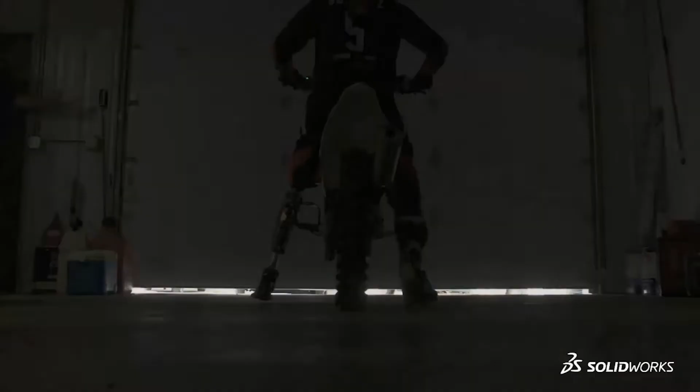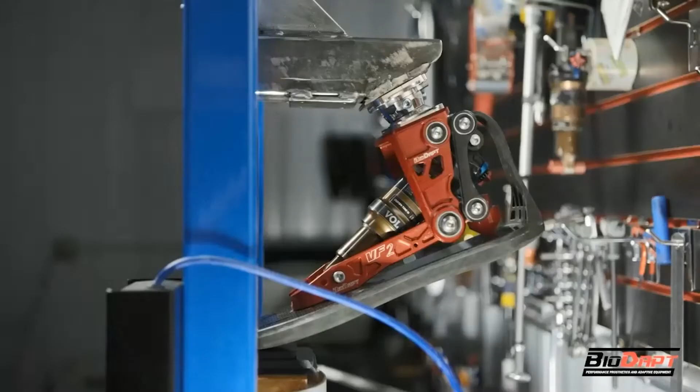Meet Monster Mike, a 36-year-old from St. Cloud, Minnesota, who has transformed the world of adaptive action sports in more ways than one. In 2008, Mike suffered a terrible knee injury during a snowmobile competition, resulting in the amputation of his left leg above the knee. Shortly after his accident, Mike was back doing what he loves, but a regular prosthetic wasn't cutting it. Using SolidWorks CAD, Mike engineered a durable and versatile mechanical knee. Within 7 months, he was again competing on the national stage at the ESPN X Games, receiving a silver medal in adaptive motocross. Mike's design has become so successful that in the 2018 Winter Paralympics, 20 athletes competed using the Moto Knee and VersaFoot to bring home a total of 11 medals.

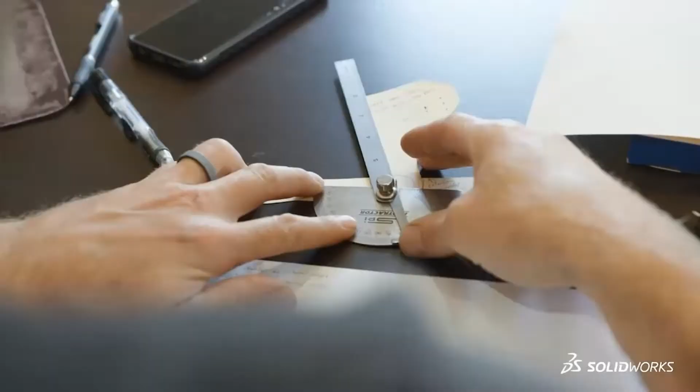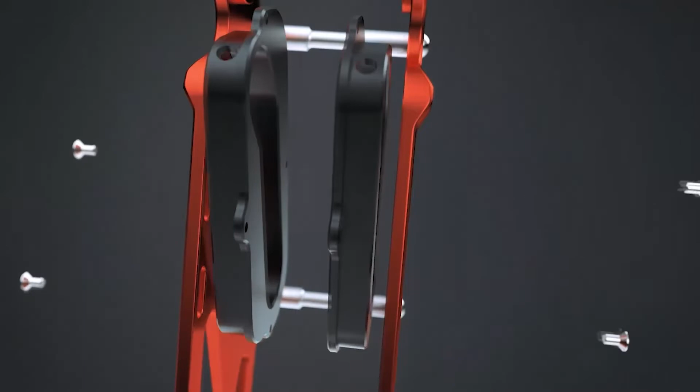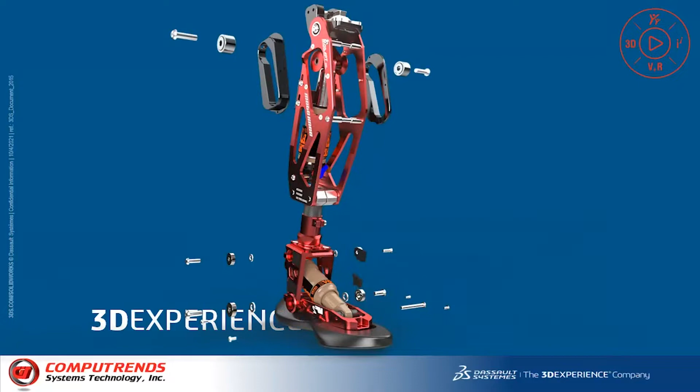Mike's company, Biodapt, along with this new line of knee and foot prosthetics, continues to evolve from its original design. Growth introduces new challenges of addressing a larger market and evolving product offerings. This is why the team at Biodapt needs top-notch product images of their newest prototype while remaining within budget. Additional prototypes and expensive studio shoots are out of the question.

Let's watch how Mike's team can tackle these challenges with SolidWorks Visualize Connected, powered by the 3DEXPERIENCE. Let's uncover how the team collaborates on new marketing initiatives, turns existing CAD design into photorealistic renderings, tests market interest with new color options, elevates product imagery with creative cameras and lighting, shows off attention to detail through exploded views, and puts it all together with a world-class presentation for sales and marketing.

Efficient project collaboration is key to getting these product renderings off the ground. Let me introduce a few of the newest team members.

Megan has been contracted to help better understand Biodapt's customers' needs, along with give their social media feed a boost with some fresh content. Don has been helping with the CAD design and has been diving into the world of rendering with SolidWorks Visualize. He will be perfect to help Megan get started with her marketing initiatives.

But these two are far from neighbors. Don lives in St. Cloud, Minnesota and reports to the Biodapt headquarters. Megan is located in sunny California, far removed from the cold winters of Minnesota. Because this team is working with the 3DEXPERIENCE, location is no longer a constraint when it comes to collaborating on projects, sharing ideas, and securing data.

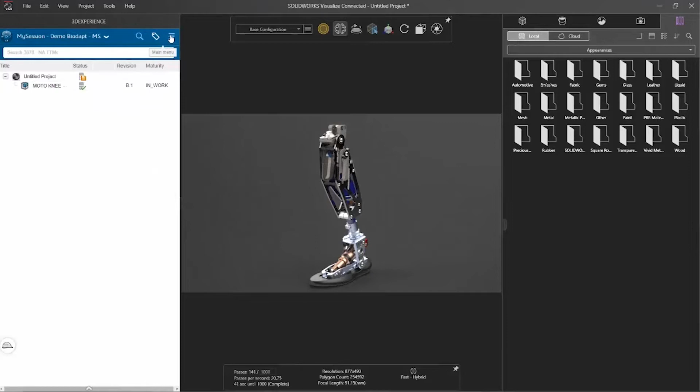A quick search finds the latest working revision of the Biodapt assembly, consisting of the Moto Knee and VersaFoot designs. Dragging the assembly from the 3DEXPERIENCE task pane brings this assembly right into Visualize for Don to start setting up the rendering project. Using the automatic import profile ensures the CAD assembly structure, material colors, and appearances are accurately carried over. Visualize Connected also creates a reference to the imported assembly.

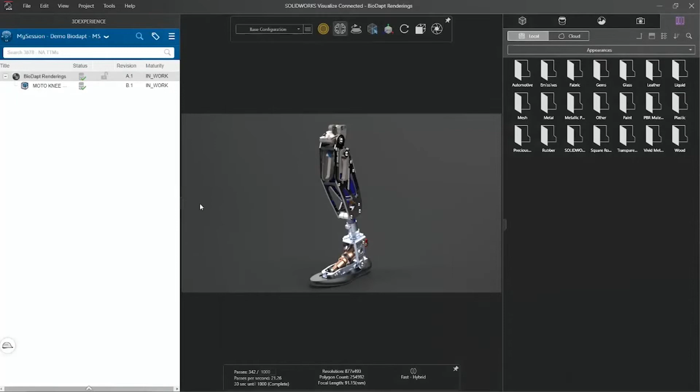If a change is made to the assembly, Don will be notified and can update his rendering project. Saving the project keeps his work secure to the cloud and accessible from any other device. The project is given a name and some revision comments during its initial save to the cloud. The 3DEXPERIENCE task pane can be collapsed to open up the simple-to-use interface in Visualize Connected. Don zooms into the VersaFoot after its fresh import to see how quickly Visualize brings these CAD models to life.

So far, we've watched how easy it is to initiate a project and begin collaborating on an idea with the 3DEXPERIENCE. Don has all of the CAD data and vendor files he needs to get started, while keeping everything secure and connected to the cloud.

This project is moving forward and Don is eager to dive into Visualize Connected. Let's see what it takes to get a few initial photorealistic renderings created.

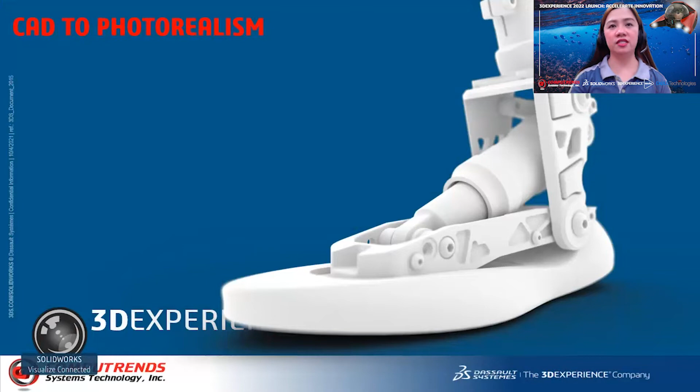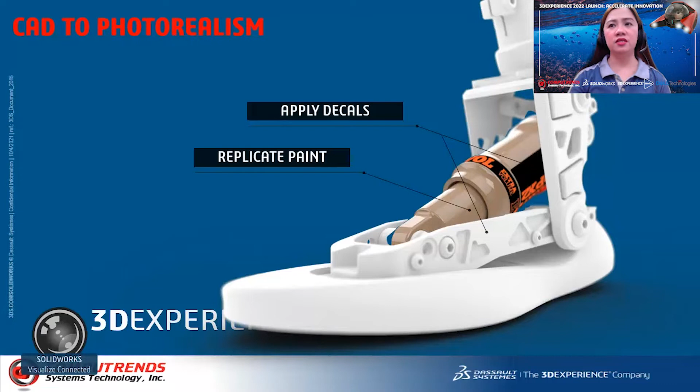For the first set of images, there are a few details that needed to be adjusted on the VersaFoot and Moto Knee assembly. Don will start off with applying some vendor decals. He will also need to accurately color match paints directly from the physical prototypes, such as the shock and the anodized treatment of the machined metal.

Since the part and assembly structure is retained during the import, it's easy to navigate, select, and isolate individual components and sub-assemblies. Don will start by applying some decals, which can be created from static images, animations, or image sequences. Megan has already supplied the approved decals from the vendor for Don to use, which has been synced locally to Don's computer through the 3D Experience 3D Drive.

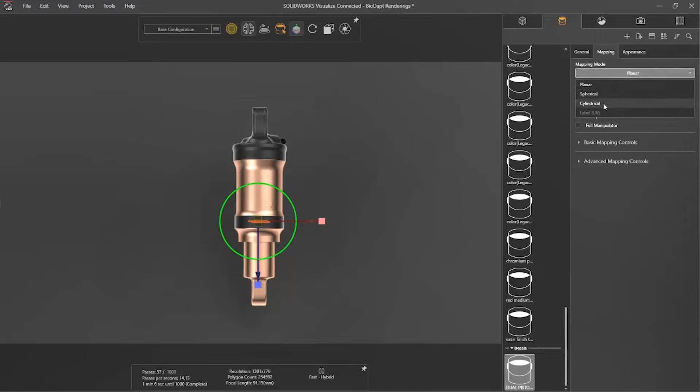Decals are applied by simply dragging the desired decal to the intended target surface. Don can accurately map each decal to perfectly wrap the cylindrical body, then with his mouse scale to the desired size. Repeating this operation for the second set of decals, scaling and positioning immediately brings the shock sub-assembly to life.

Taking a look at the material finish carried across from CAD shows a close resemblance, but it isn't perfect. Custom materials are simple to create or modify in Visualize Connected. In this case, selecting paint from the extensive material types gives the desired effect.

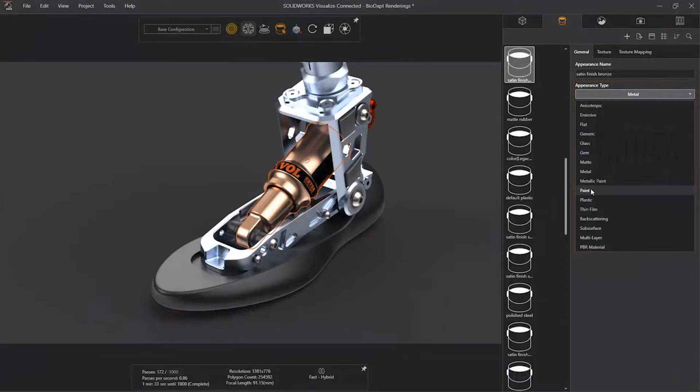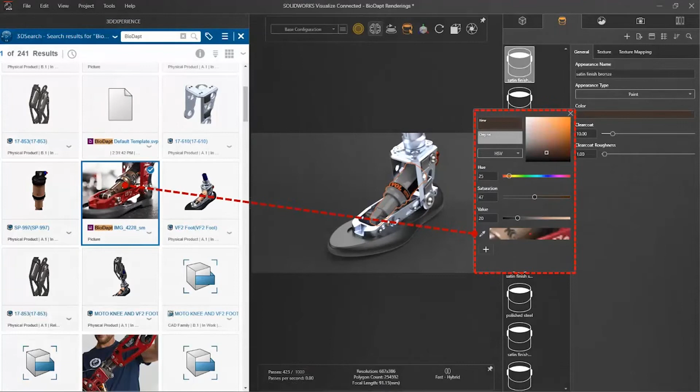And to make sure the color is an exact match, Don opens his 3D Experience task pane to reference an existing picture that Megan has added to the team's collaborative space, which is easily found from his search history. Having an image as reference is a handy way to make sure these renderings are as close to lifelike as possible.

Visualize takes it another step by giving Don an easy color picker to directly extract the color and match it in his rendering. Now to repeat this process for the machine components of the VersaFoot, the metal materials have already been defined and carried across from CAD. Don just needs to color match the anodization from the existing new generation prototype.

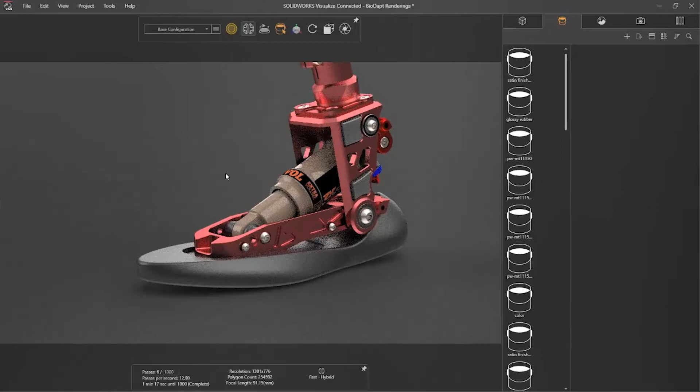As Don makes the appearance modifications, visual real-time rendering makes sure he is seeing exactly what his final renderings will deliver. There are a few more steps to the VersaFoot assembly.

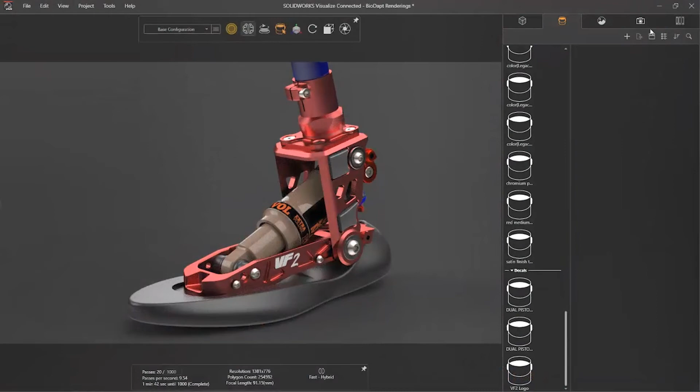The VF2 decal can be applied and adjusted into position just as we saw before. Additional appearances can easily be applied as well from the Visualize library. Adding a carbon fiber finish can be done by searching the library for the appropriate appearance by dragging and dropping.

So far, this project of the VersaFoot is looking great. With direct access to the most current CAD revision and an easy-to-use interface, Visualize Connected makes for quick work to import a design and its defined materials, add decals, and create additional custom appearances on the fly.

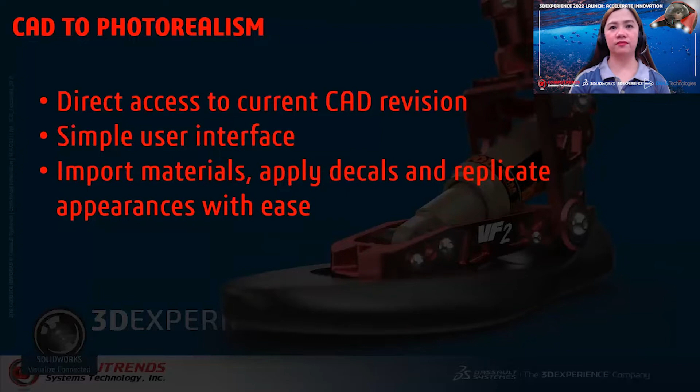Don has a good start on the static renderings, but still has a few specific items that Megan has requested. Megan wanted to see what some color options would look like and use these images for social promotion to hopefully identify some new opportunities.

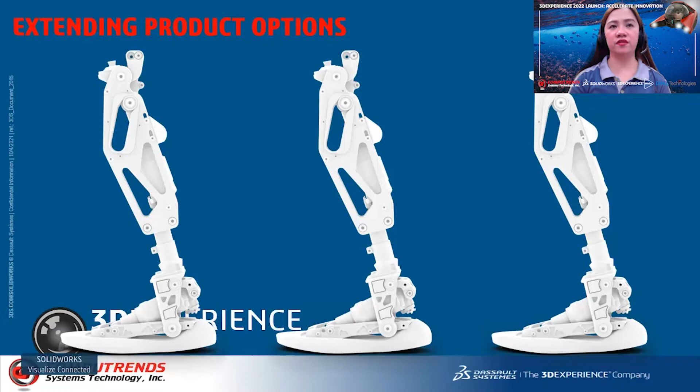Don has a little more work to do to complete his initial rendering, to include his color match appearance to the rest of the leg, and create the rest of the color options from Megan's request. Mean Machine Green and an electric blue version are sure to drive some excitement.

Applying appearances to the rest of the assembly is a quick process. A control left click and control right click copies and pastes the custom material to all of the additional machine components, inserts, and other hardware.

Creating a new configuration of the model tracks any changes in the model appearances. Don will create a few of these for each color that Megan has requested.

Don will be modifying the color of the anodized appearance. Creating a duplicate copy of the existing red is only a few clicks. Modifying the appearance to a bright mean green is done through an industry standard HSB or RGB color palette selector.

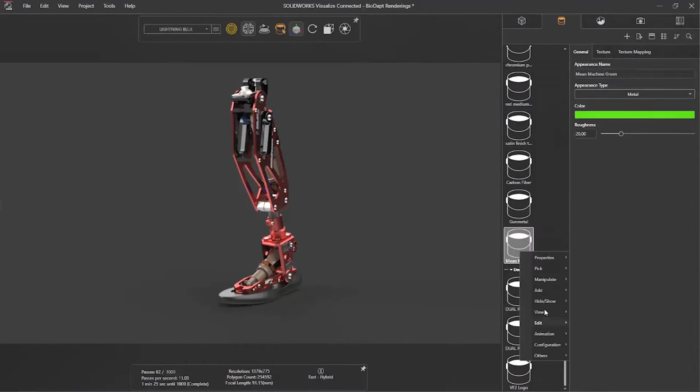Don repeats the process for the blue variation and includes a carbon fiber version as well as requested, and with real-time rendering in Visualize, he gets a direct look at how each of these new appearance options will look after production. Applying custom appearances to the rest of the model is a fast workflow using just one of the long list of customizable hotkeys available in Visualize Connected.

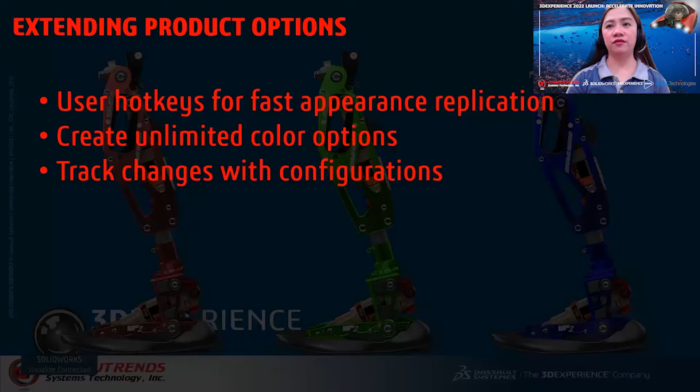This helps speed up the process of creating multiple product configurations that are easily managed, giving Don and Megan tons of creative freedom. Creating the requested additional configurations was a super simple process.

Now it's time for Don to bring some creativity to these renderings. With endless possibilities of a virtual photo studio, let's see how Don can add some professional touches to his final renderings. With SolidWorks Visualize Connected, adjusting camera positions and perspectives, applying depth of field, and adding additional detailed studio lights can really make this design pop.

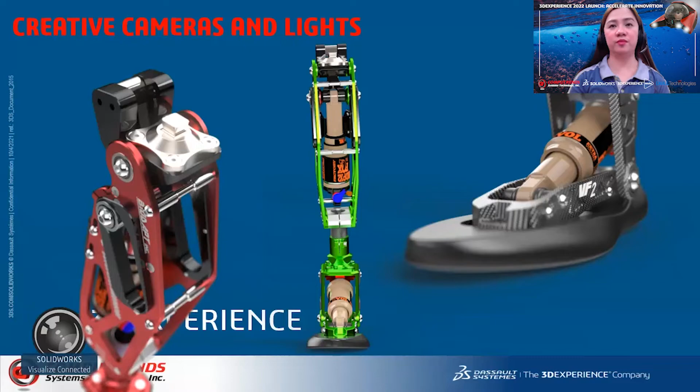Let's jump back where Don has just finished up the last carbon fiber configuration and is ready to create some custom cameras. The camera is actively positioned with the mouse to get the right angle.

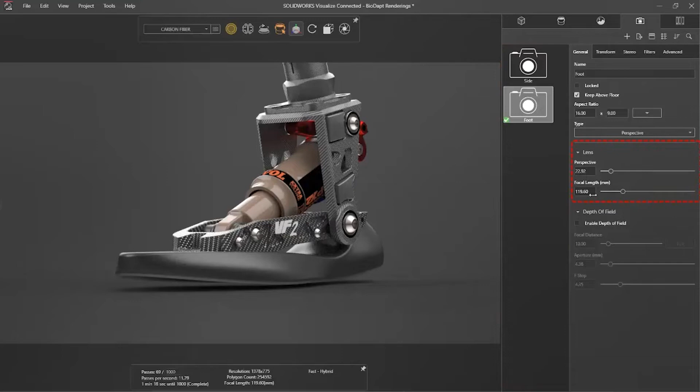An endless amount of cameras can be created for each project and exported to other projects, and all allow for simple, standard camera adjustments, like focal length to change the model perspective.

And depth of field to add blurriness to the foreground and background. This really helps draw the viewer's eye to specific areas of the rendering, along with adding an extra level of photorealism. Cameras and configurations work hand in hand.

Different model appearances can be switched and the changes are reflected through all of Don's custom cameras. Scrolling through each configuration to check that this angle looks great for all of the color options. Creating another camera view, Don is also able to select standard model views, in this case grabbing a front view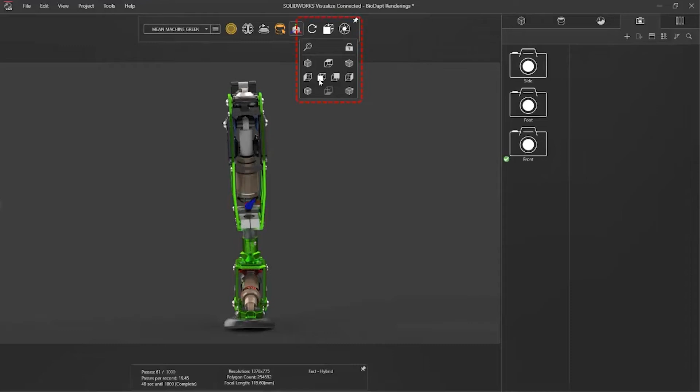of the entire assembly. Don notices the model needs some lighting to help illuminate the shock absorber in the moto knee assembly. Creating a custom light only takes a few clicks. Selecting a target to light, a light position, or in this case, using the camera position, are all easy options. Bring professional-looking lighting to any Visualize project.

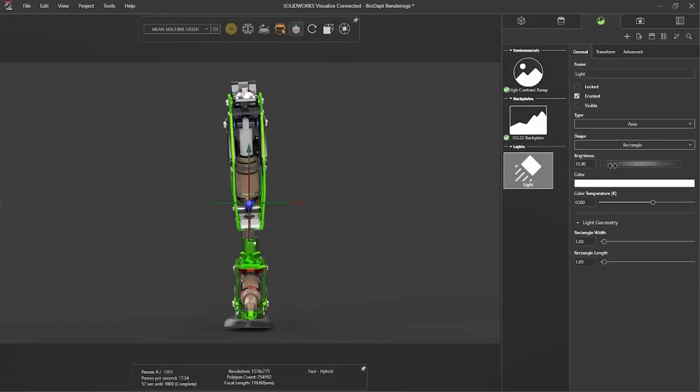Don also creates a missing appearance. Using his handy hotkey, he finalizes all the appearances in the entire assembly. Now, with 3 total cameras and 4 appearances, 12 eye-catching images are ready for their final high-resolution renderings.

Including the alpha channels, which gives transparency to the rendering background, is perfect for repurposing for downstream tools, such as common editing and presentation software like Photoshop and PowerPoint.

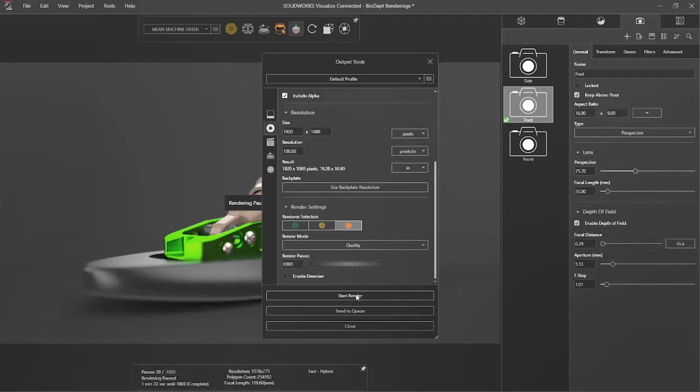With the renderings complete, Don heads back to the team dashboard to share an update to Megan's idea. He will also include a collage of some renderings he has completed up to this point.

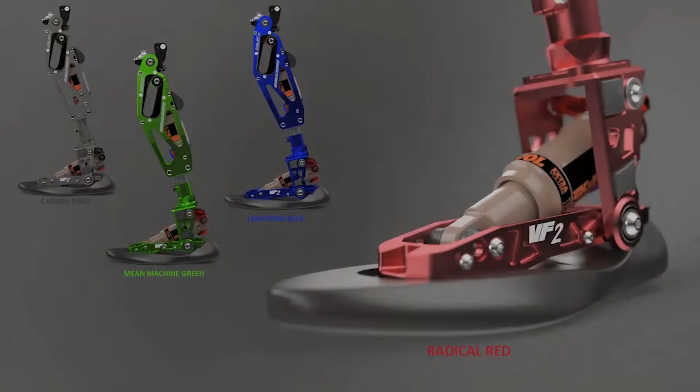For Don, adding in a handful of camera angles and depth of field really brought this project together. Adjusting the lighting so every detail of the model is included was also a snap. And with his previously created configured appearances, Megan is going to be blown away with the amount of content created.

Don has definitely beat Megan's expectations, but her wish list is still incomplete.

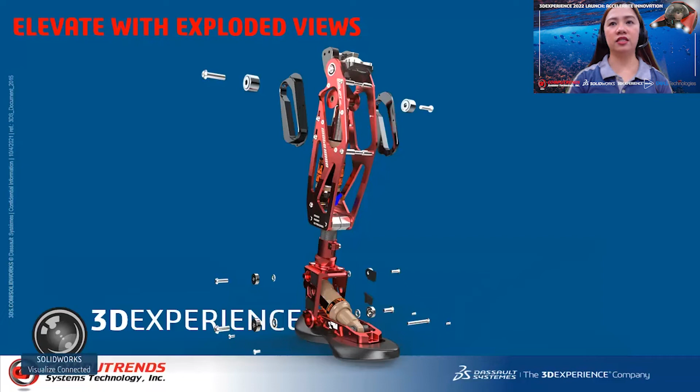Don's last task is to create some exploded renderings to highlight the detail and quality of the moto knee and VersaFoot design. Exploded product renderings are an eye-catching and creative way to show off your product. Getting this type of shot in a traditional studio would take days of preparation.

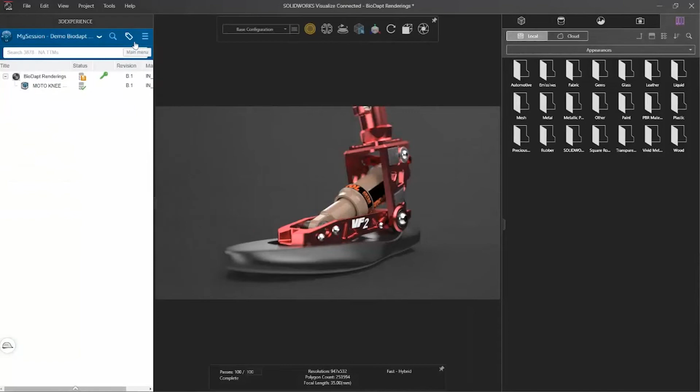Let's take a look. It's a new day for Don. To get started with the new set of renderings, he will need to open his saved project from the cloud. A keyword search filters down the company's shared data. Dragging the project into Visualize moves the project locally and lets Don continue where he left off.

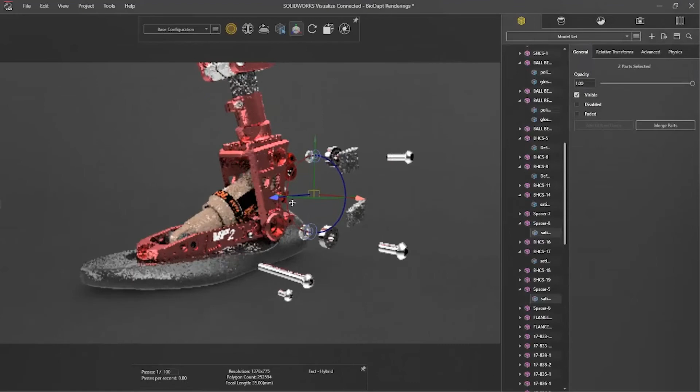Don will use a new camera for these exploded views and can start clicking on parts in the assembly and sub-assemblies. Using a simple triad allows him to translate and rotate components into place, in this case grabbing the VersaFoot fasteners, bearings, and bumpers. Once he is happy with the position of each, adding in some depth of field to adjust focus, and then quickly duplicating the camera to exchange that focus point to the branding located on the VersaFoot.

Don will repeat this process, this time focusing on the inserts, fasteners, and bearings located at the top of the moto knee.

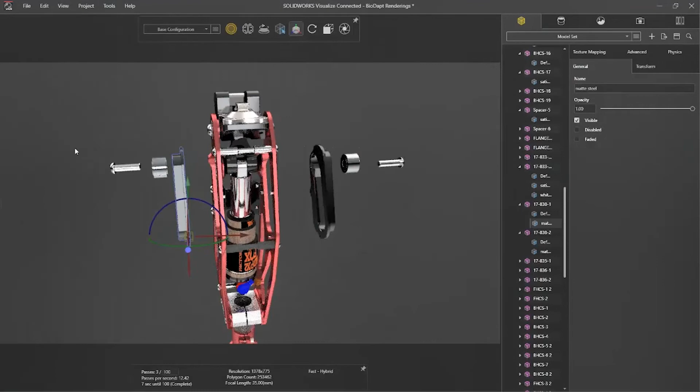A few more cameras are added, and then it's time to save the project. Since these exploded states have modified the entire model, a new revision will capture this and keep the original rendering project available. Using the 3DEXPERIENCE task pane, these are easily added.

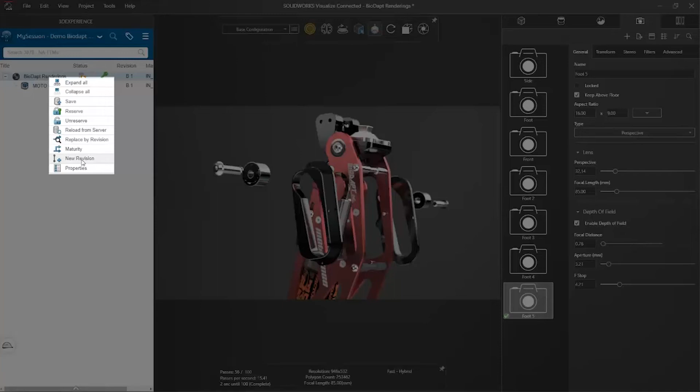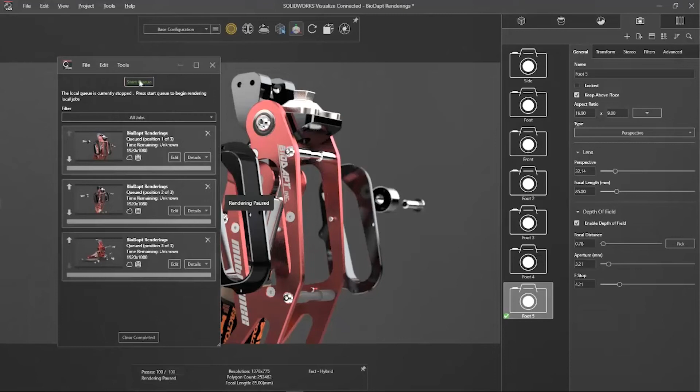The initial project creation, static renderings with appearance configurations, and now an exploded view project are all captured and stored on the cloud. Camera views and configurations can be added individually or as a whole in the Visualize rendering queue. Load all of the set of cameras and configurations to the rendering queue, and Don is free to work on some other tasks while this process runs.

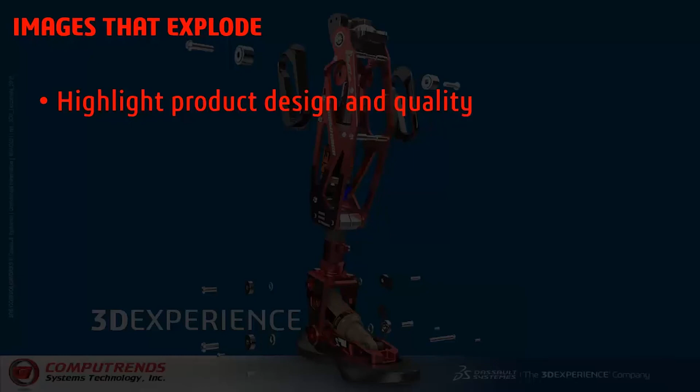Exploded images are a unique way to show off the quality behind each product design. These types of images take days to create through traditional methods, and are exactly what marketing and sales teams are asking for. Now that the exploded views have been created, it's time to show this off to the team.

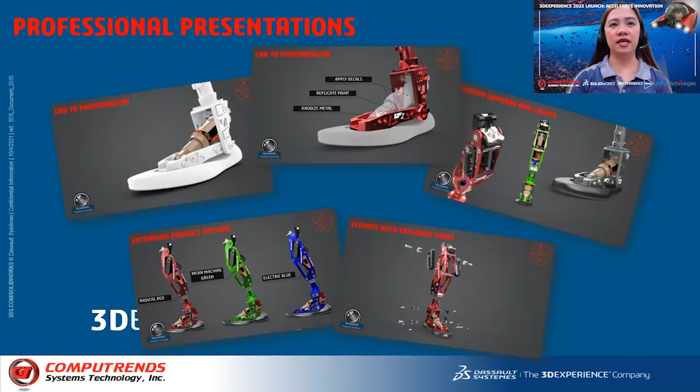Throughout this presentation, images created in Don's workflow have been used to show the simplicity and power of Visualize Connected. From setting up detailed CAD shots, modifying and creating custom colors, and creative cameras to complex exploded views.

SolidWorks Visualize Connected can do much more. How about interactive content through your website? This can be viewed through any web browser. Or truly bringing your product to life with mind-blowing animations, let's take a look.

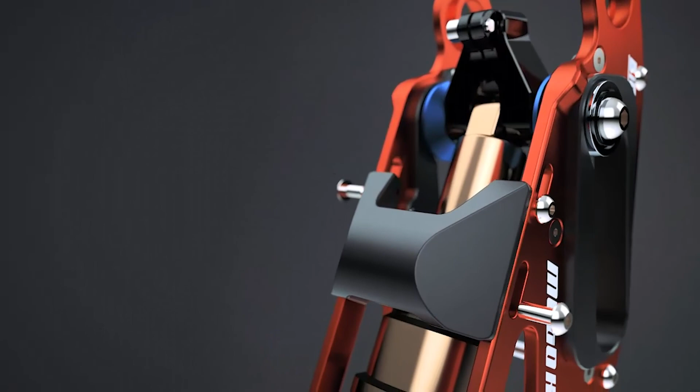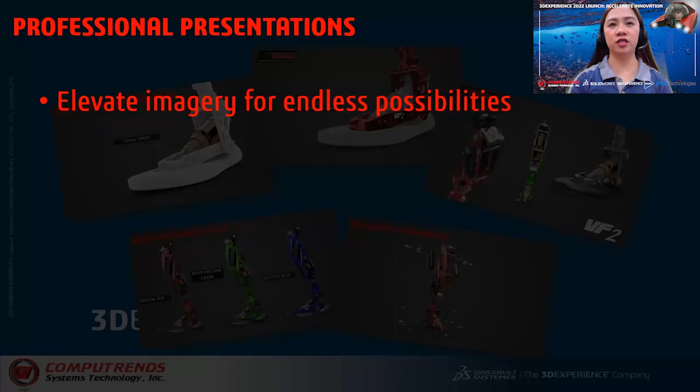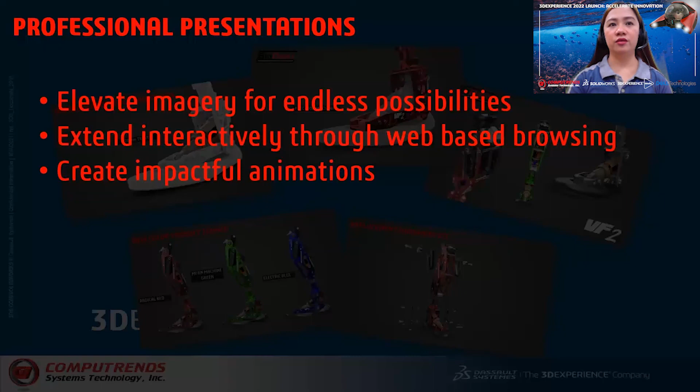Other areas of the company will love the reuse of these types of images for all sorts of downstream use. Your customers will love the interactive content delivered to their fingertips. And your competition will hate seeing your product come alive through impactful and memorable animations.

The last thing for Don to do is let Megan know his portion of this project is complete. All of his deliverables will be uploaded through the 3DEXPERIENCE 3D Drive and instantly accessible by Megan to kick off her portion of the marketing campaign with world-class images.

Through project collaboration for communication and working with the most current dataset, Don was able to leverage the moto knee and VersaFoot assemblies to create some photorealistic images.

Include future color options and material considerations. Add creativity with additional cameras and studio lighting. Elevate these images and highlight product detail through exploded views, which all come together to make stunning, memorable presentations.